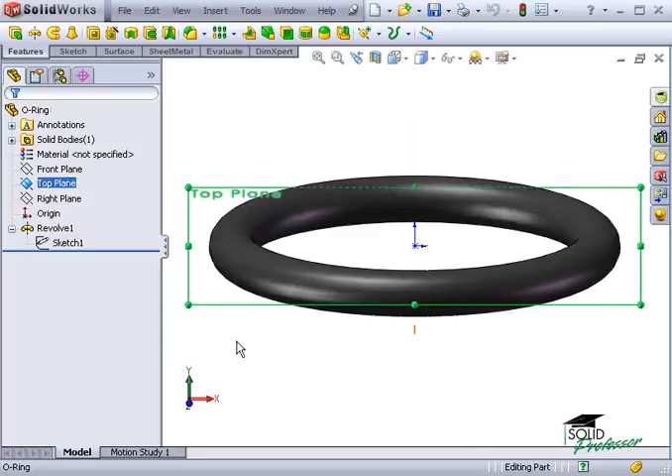Properly mating an O-ring into its corresponding groove can be a challenge if you're not familiar with the concept of using reference geometry to create mates. This simple O-ring was created by first sketching a circle and then revolving it around a center line. Notice in the sketch that the circle was created such that the top plane runs directly through the center of the O-ring. This is intentional and can be used for positioning later on.

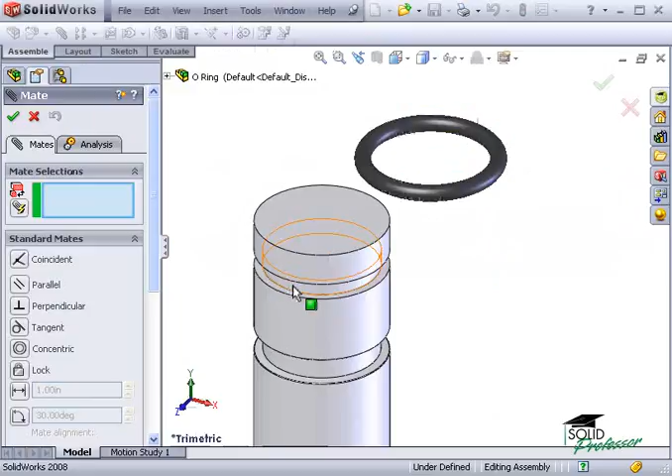The challenge now is to fit the O-ring into the groove. I'll drag the O-ring into the assembly with the cylinder and launch the mate command. The first thought would be to click on the ring and the cylinder and expect to create a concentric mate. Unfortunately, when I select the two faces, the concentric mate is not an option. The tangent mate is the only available option and will not produce the desired result.

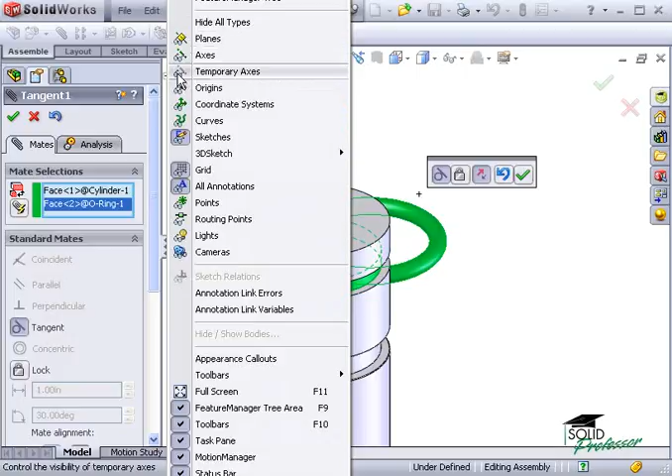The trick to aligning the two parts is to make use of the temporary axis of both parts. From the View drop-down menu, select Temporary Axes. This will display an axis that runs along the center of the cylinder and also displays an axis along the center of the ring. The two temporary axes can now be selected to create a coincident relationship, effectively centering the ring on the cylinder.

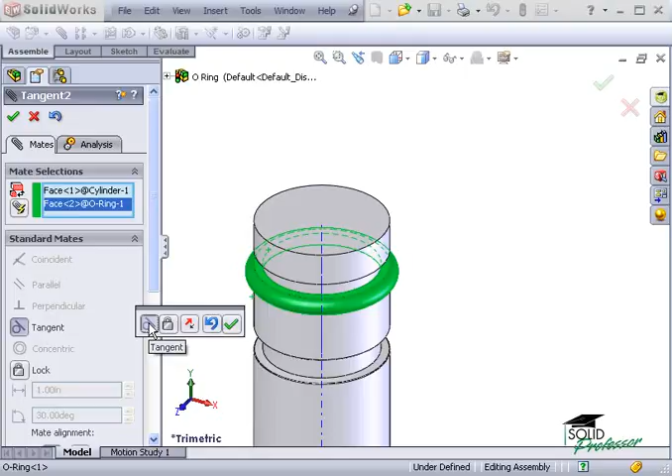To align the ring along the length of the cylinder, I can use a tangent mate. If the ring ends up on the wrong side, you can use flip mate alignment. Creating a section view of the assembly, you can see the groove is perfectly sized for the O-ring. Because of this, the single tangent mate is all that's necessary to position the O-ring.

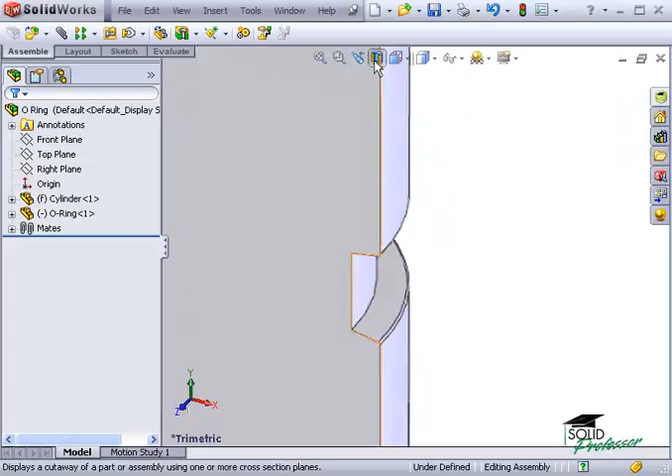There's a second groove on the cylinder that's not perfectly sized for the ring. In addition, it has angled sides, making a tangent mate impossible. So how can a ring be centered on this groove? Well, first, let me create a copy of the O-ring by control-dragging the existing ring. I'll add the coincident mate between the temporary axes as before.

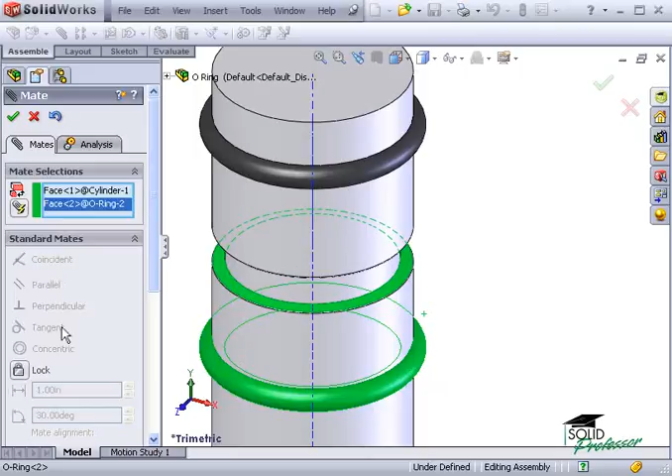This time, selecting the ring and sidewall will not allow for a tangent mate. Even if a tangent mate was possible, it wouldn't center the ring within the groove. To position the ring, I'll make use of both reference geometry and sketch geometry. In the Feature Manager tree, I'll find the sketch used to create the groove, and I'll make it visible. Now, I can add a mate between the center line in the sketch and the top plane of the O-ring.

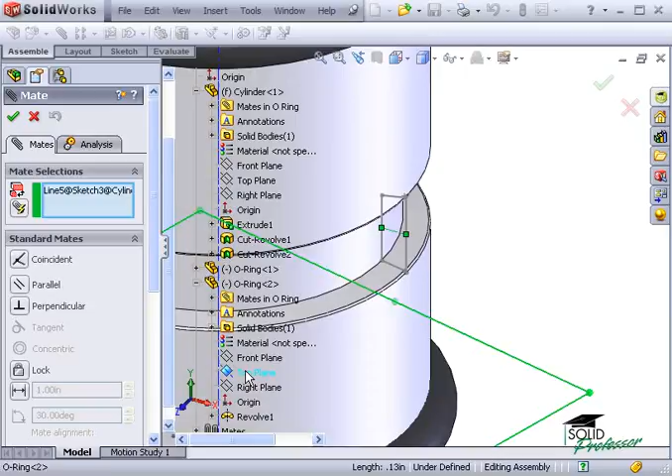In both cases here, the diameter of the O-ring was defined in such a way that it fit perfectly around the cylinder. If you want to be sure that you end up with the proper diameter, you can create the O-ring in the context of the assembly using top-down design techniques.